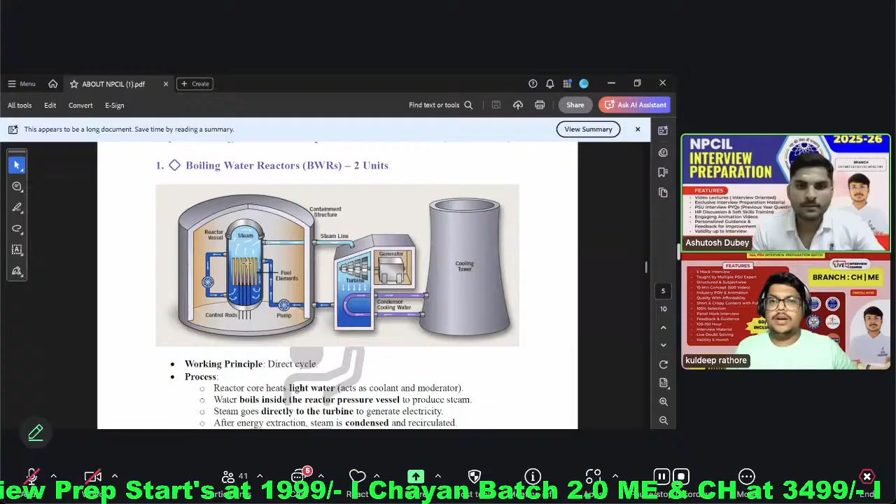Here the main problem is that our primary and secondary coolant are in a single cycle. So most of the radioactivity also comes into the turbine building. So this is the disadvantage of this type of plant. The Tarapur 1 and 2 are boiling water reactors.

And this is a standardized PHWR - indigenous plants, standardized PHWR. Here we follow three cycles. The primary cycle we call primary heat transfer, so it goes from the reactor to our steam generators.

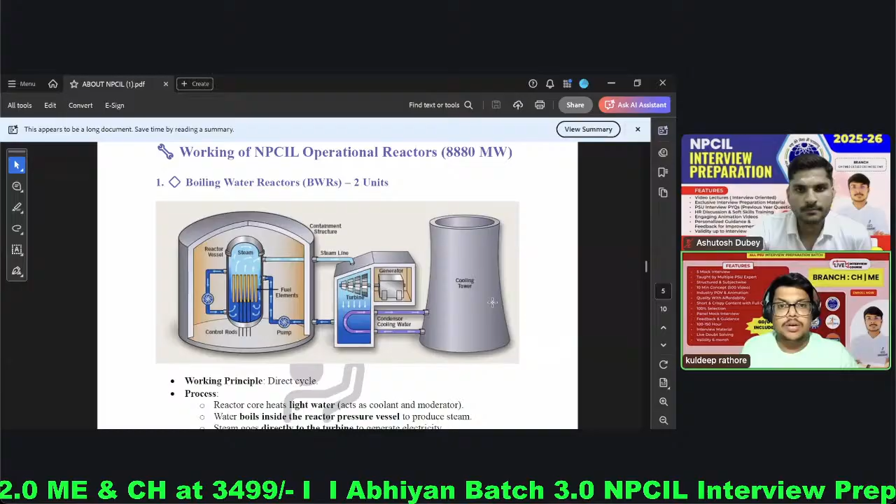And there is the secondary cycle which includes steam generators, turbine and condenser. And to cool the condenser water, we use the tertiary cycle. So there are three cycles in standard PHWR. But in boiling water reactor, there are just two cycles - primary cycle from here to here. So BWR has two cycles, and PHWR has three cycles.

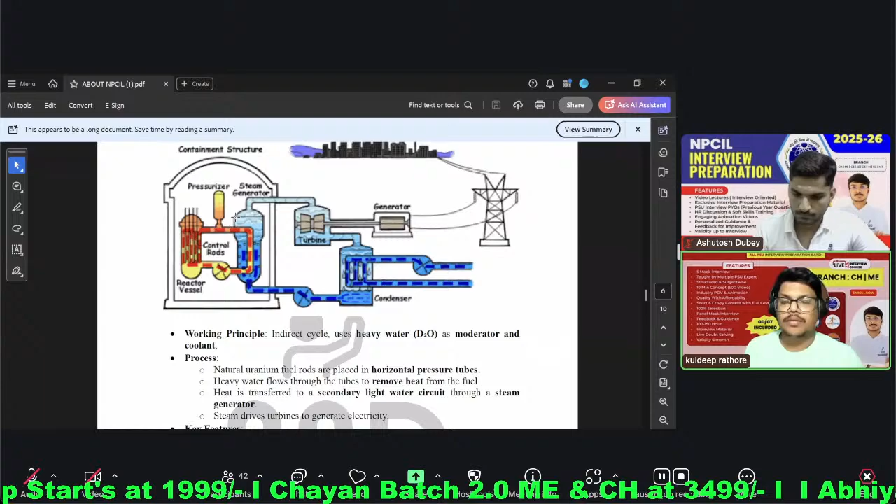So here we use moderator and primary transfer medium - both are D2O. So PHWR uses D2O in the primary cycle. BWR and LWR use light water.

So here also just three cycles - primary from core to steam generator, secondary from steam generator to turbine and condenser, and third cycle from condenser to cool the condenser. The main difference between LWR and PHWR is here.

It shows that in PHWR we have control rods and calandria, with fuel in the horizontal direction. In LWR we use a pressure vessel where fuel is in the vertical direction.

And the other thing in LWR we use enriched fuel, enriched uranium - approximately 5% uranium-235. But in standard PHWR, we use natural uranium, which has approximately 0.7% uranium-235. Enriched uranium has approximately 4.3 to 5% uranium-235.

Okay, so sometimes they can ask why. Just give me one second.

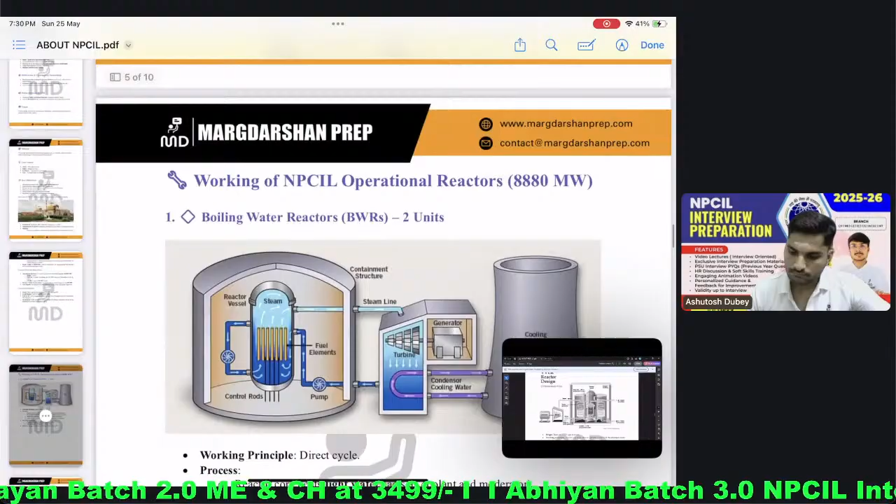So Pressurized Heavy Water Reactor, as given in the documents also - I will tell you, Pressurized Heavy Water Reactor is where the coolant is D2O. Basic information you need to know - coolant is D2O.

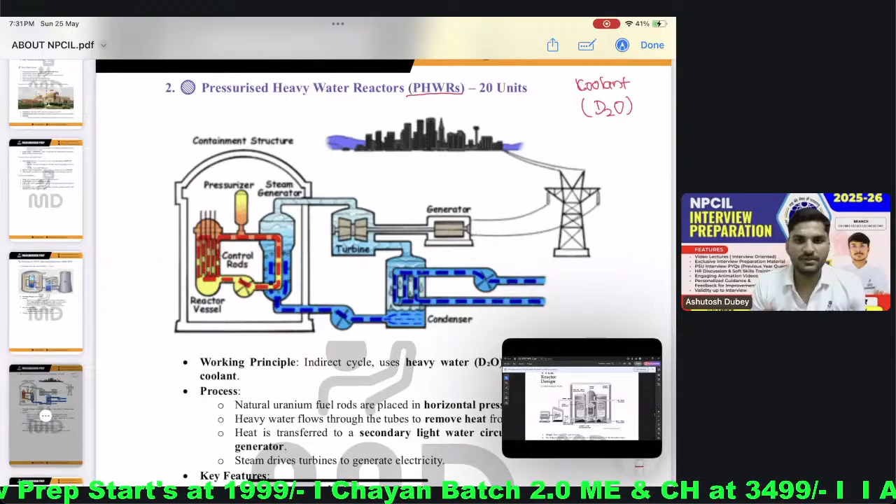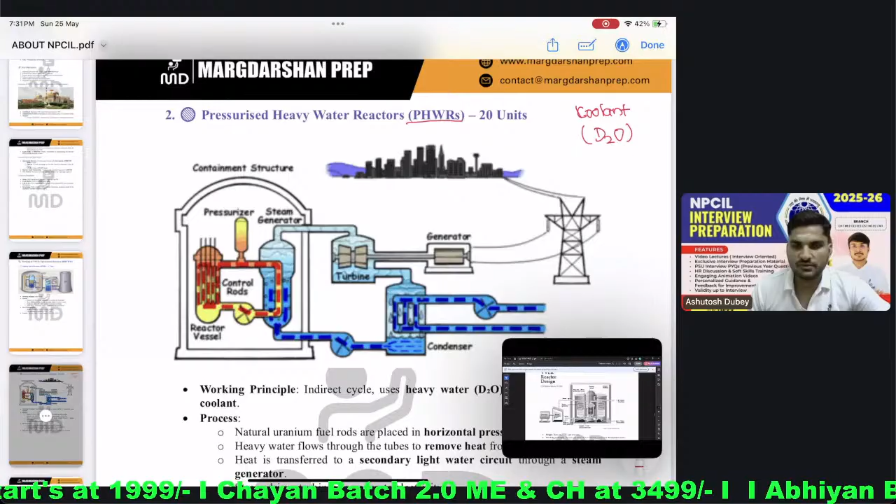Its full form is pressurized heavy water reactor. Currently, NPCIL's whole vision, whatever projects it is expanding in future, all reactors are mostly coming in PHWR. LWR is another technology, it is Russian technology. LWR plants are in Kudankulam near Kanyakumari. So LWR is light water reactor, PHWR is pressurized heavy water reactor. LWR uses light water as coolant, that's why it is called light water reactor. Pressurized heavy water reactor uses coolant D2O, so that is called PHWR.

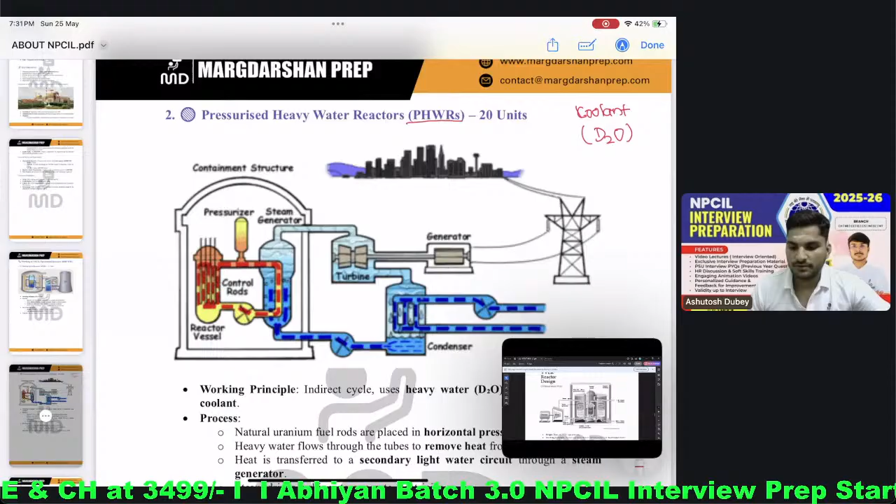All the expansion plans of NPCIL are centered about this PHWR technology. As sir told you, PHWR technology expanded initially at Madras Atomic Power Station. After that, Rajasthan RAPS 1-2 came. Tarapur also came, now known as Tarapur Boiling Water Reactor. This was the first plant, which came around 1969. This is boiling water reactor, a different technology from the two I told you, PHWR and LWR.

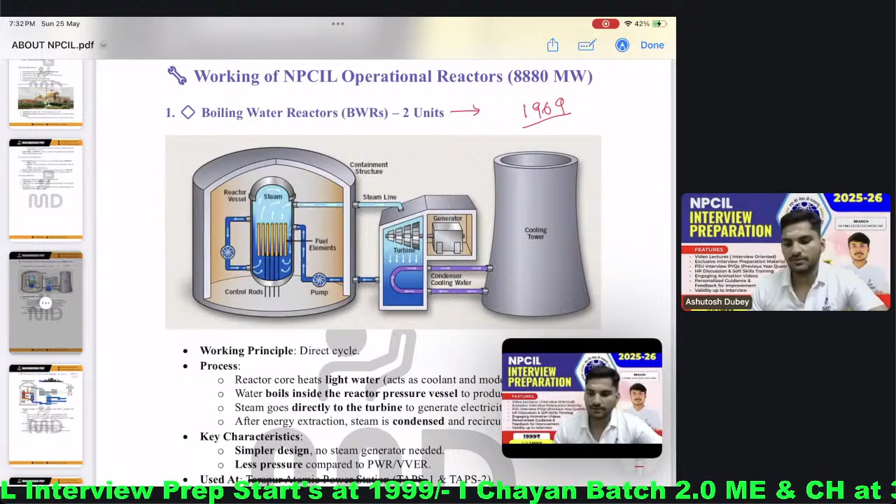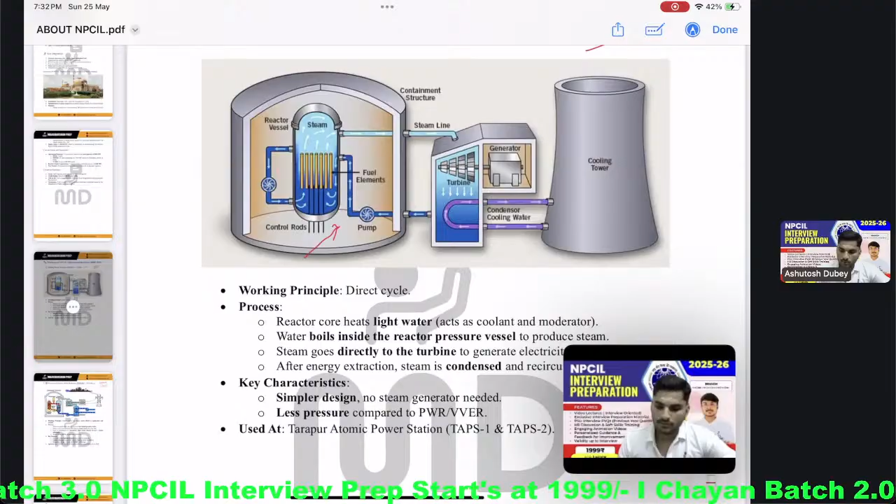This is the initiation of nuclear technology in India. This is still in Tarapur, known as TAPS 1 and 2. Some modification work is still going on in this unit. In this case, the water is directly boiled into the pressure vessel. So this steam, which is generating inside this vessel, is directly going into the turbine.

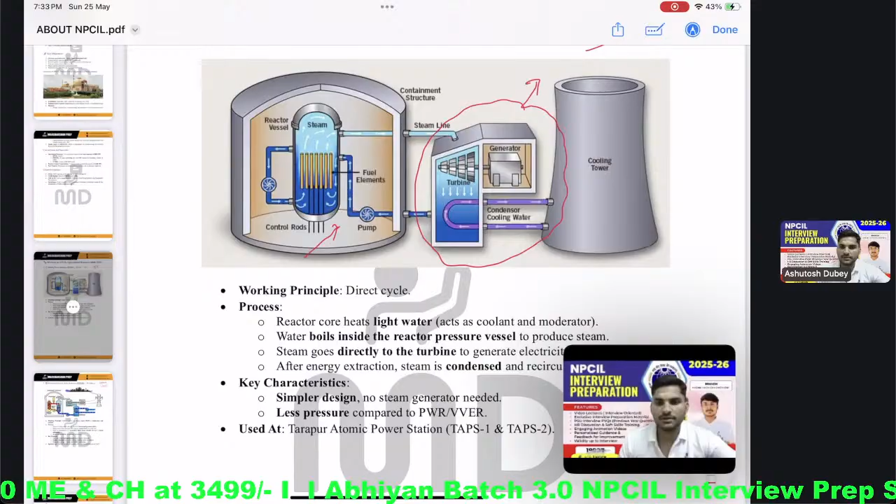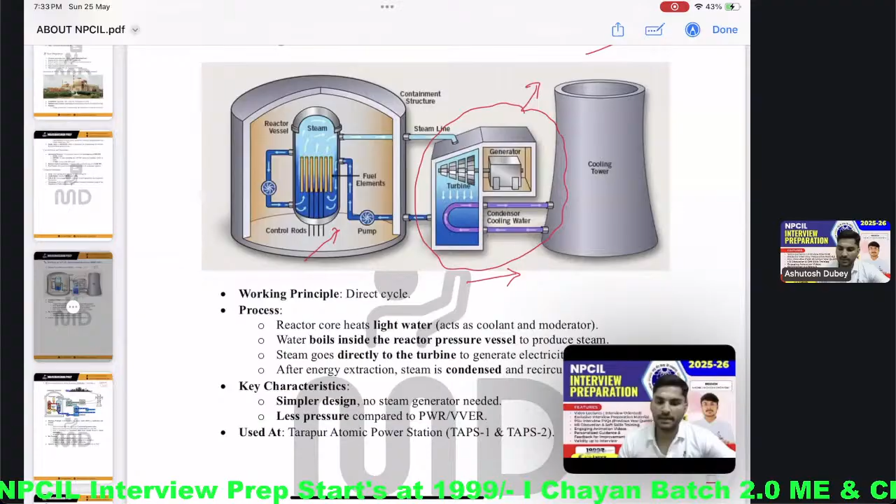One major disadvantage of this type of reactor is that the turbine building also gets contaminated, as radioactive substance goes there. But still, it was like a testing approach from NPCIL. So this is actually a legacy type of thing for NPCIL or the nuclear industry in India. After that the expansion plan came, like MAPS 1, 2 and RAPS 1, 2, Rajasthan 1 and 2 and Madras 1 and 2. Those were PHWR, but it was not standardized.

After that, one plant came, Narora. Someone is saying that voice is lagging. Jess, can you confirm that?

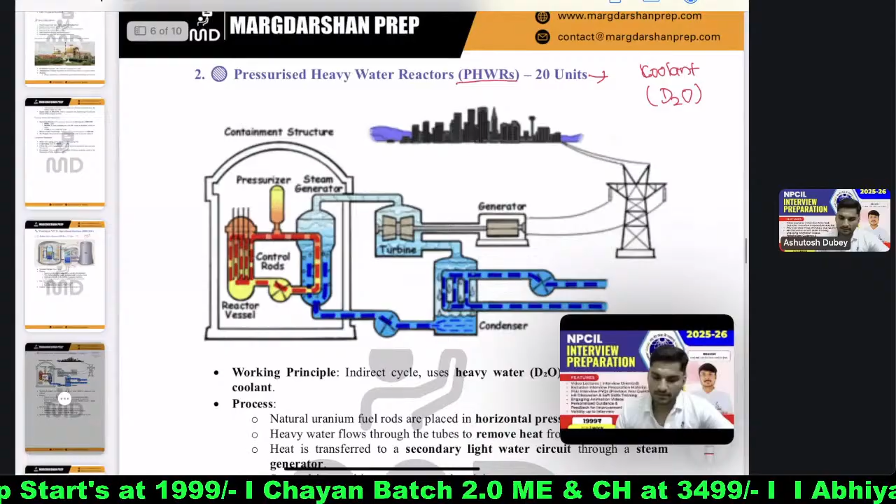After that, Madras and Rajasthan 1 and 2 came together, so they were not standardized. Actually after that, some problems came through Canada and the CANDU type of reactor, if you go deep you will see that. So countries like Canada stopped supporting us. After that, our own engineers and scientists developed new technologies, and through that they standardized some things in this reactor.

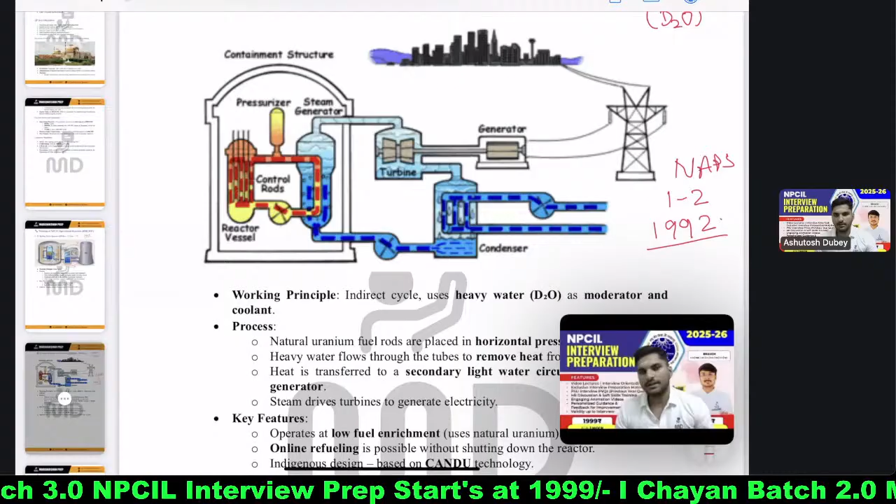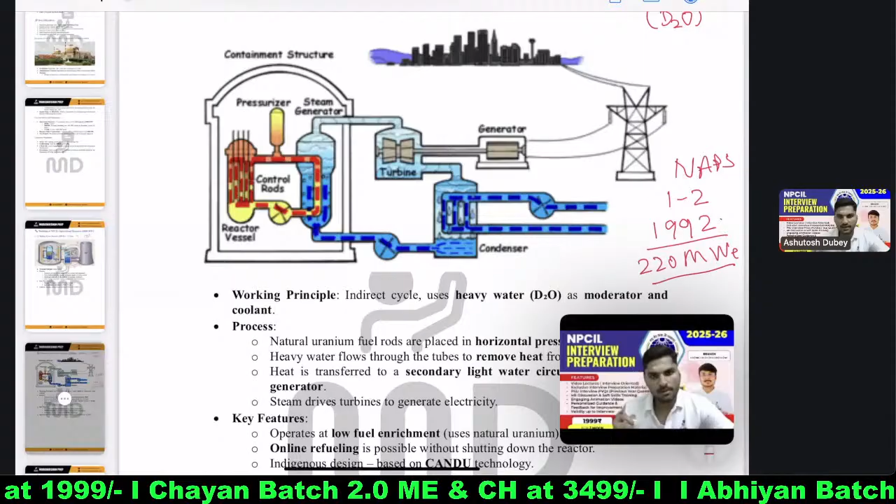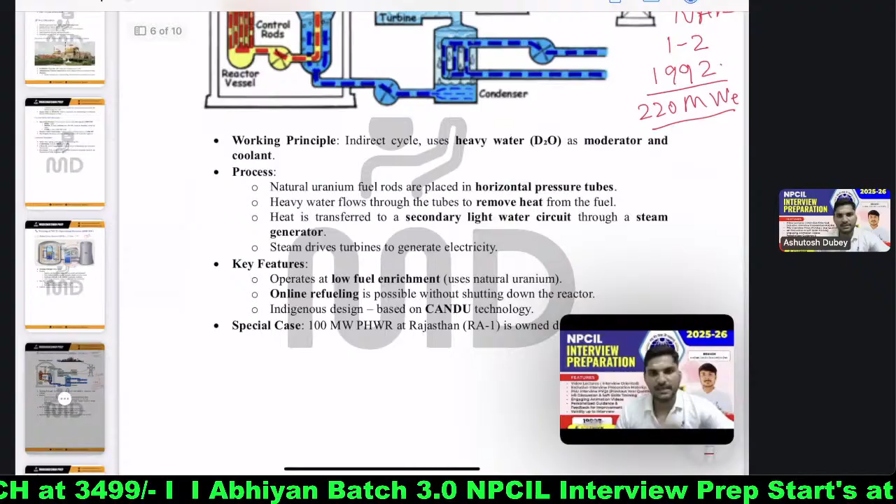After that, NAPS 1, 2, Narora Atomic Power Station, came around 1992. Because of learning from previous experiences, we were able to build this. This is also 220 megawatt PHWR. LWR is only Kudankulam, and you can say TAPS 1 and 2 are also some type of boiling water reactor. After that, major expansion came to Kakrapara 1 and 2. Those are all standardized plants, meaning there were some more modifications into that.

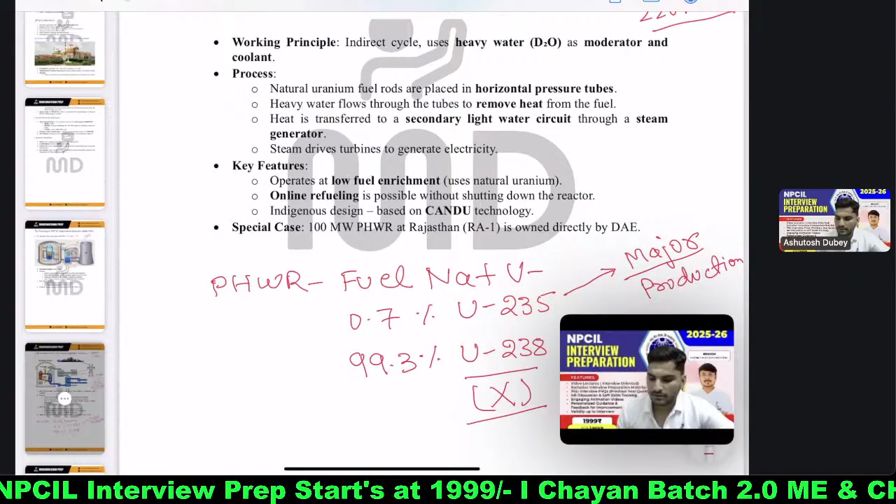One more thing that can be asked to you in interview is which type of fuel is used in PHWR. In PHWR, fuel is natural uranium. Natural uranium contains 0.7% of U-235 and the rest, 99.3%, of U-238. Naturally, that fuel has 0.7% of U-235 and 99.3% of uranium-238. Major electricity or energy production comes from U-235 only, because it is a fissile material. U-238 does not produce any energy inside the reactor. So this is a basic thing that can be asked.

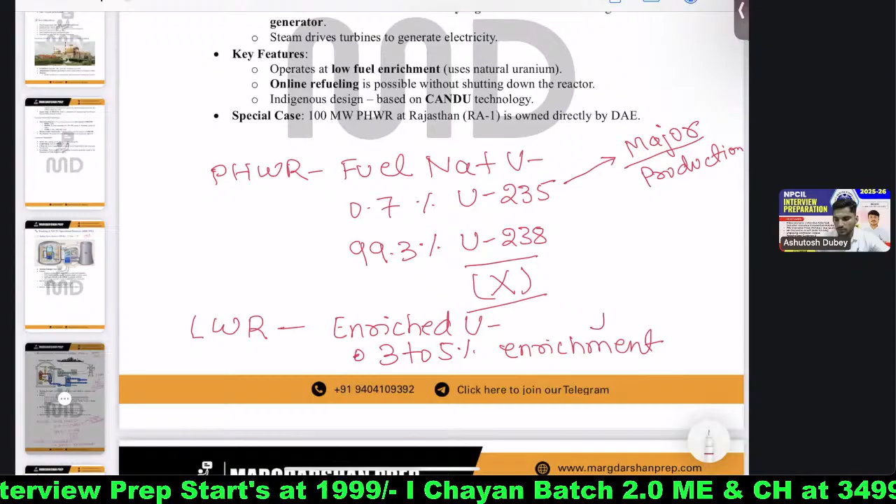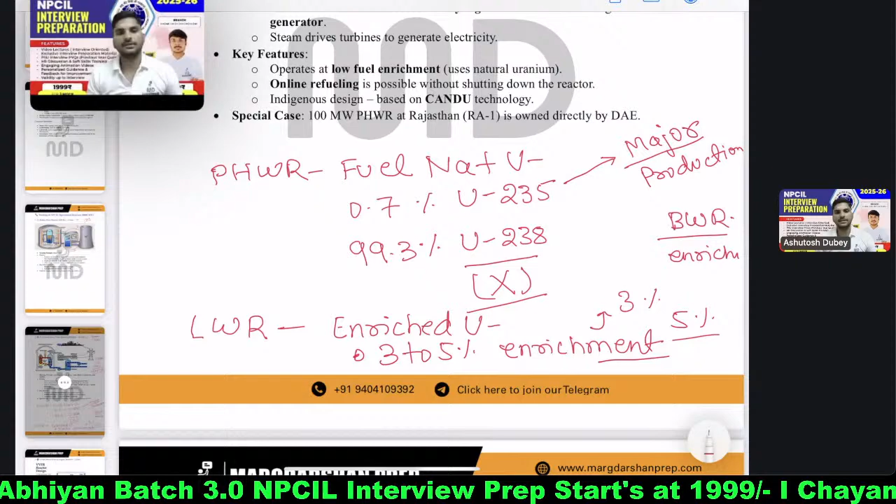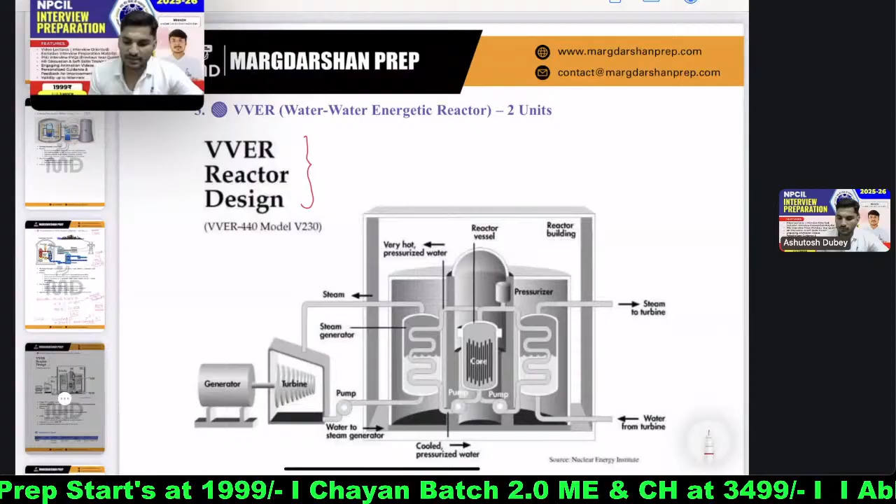In case of LWR, we are using enriched uranium. Enriched uranium means 3 to 5% enrichment is done in natural uranium. In this case, uranium-235 will become 3% or 5%. So these are the two technologies that we are majorly using. And in BWR also, enriched uranium is used. So these are the three major types of reactors that NPCIL is operating. This VVER reactor name is Russian, meaning water energy reactor.

Actually, Voda means H2O, because H2O is being used as coolant. That is why it is known as Voda. This is a Russian name. So here also one reactor vessel is there, and in that reactor vessel, coolant channels are aligned vertically.

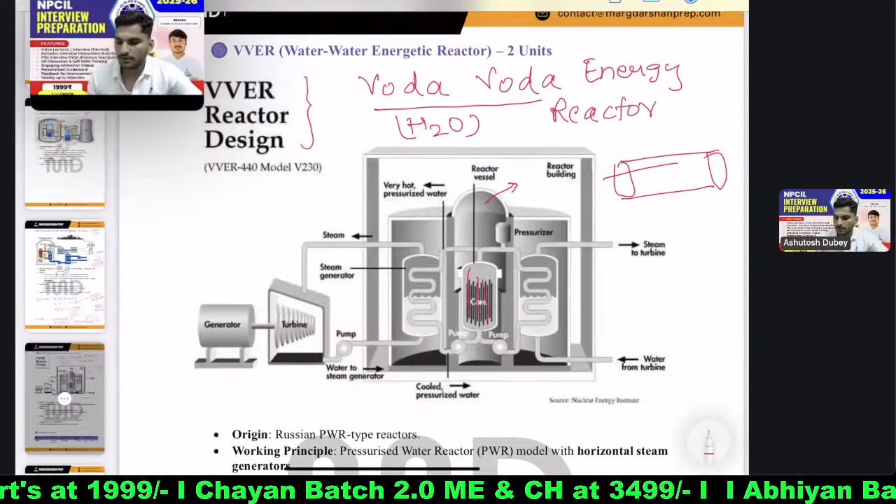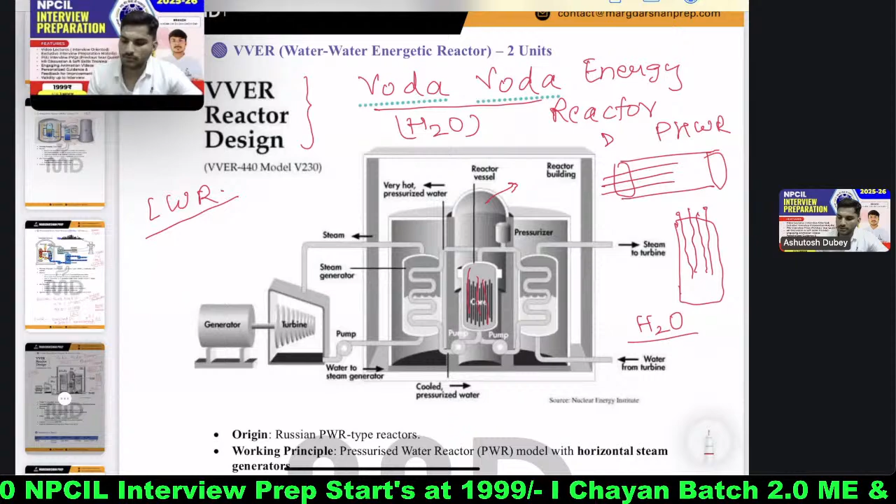Like in PHWR, coolant channels are aligned horizontally. This is PHWR, and this is your VVER, also called LWR, light water reactor. Here coolant channels are aligned vertically and coolant is H2O. In PHWR, coolant is D2O. Same technology here, we have just aligned the coolant channel vertically.

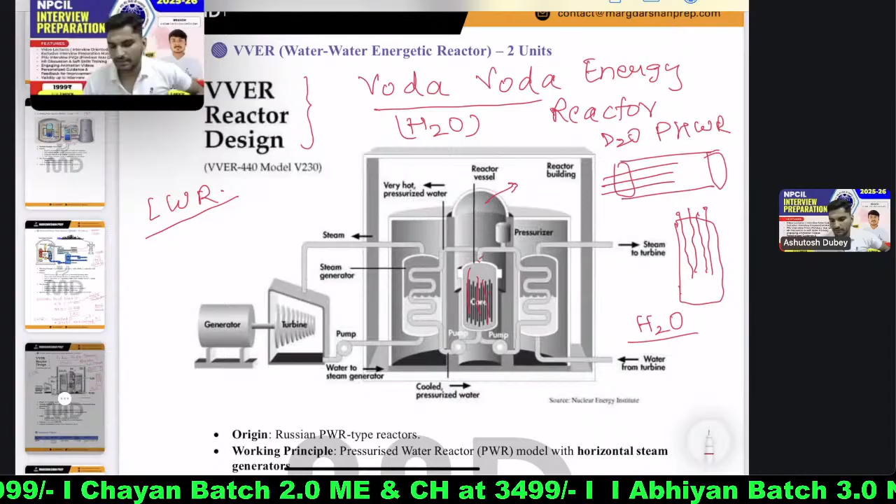After that, the same coolant H2O goes to the secondary side, that is the turbine side, and there the heat exchange happens, and according to that electricity is being produced.

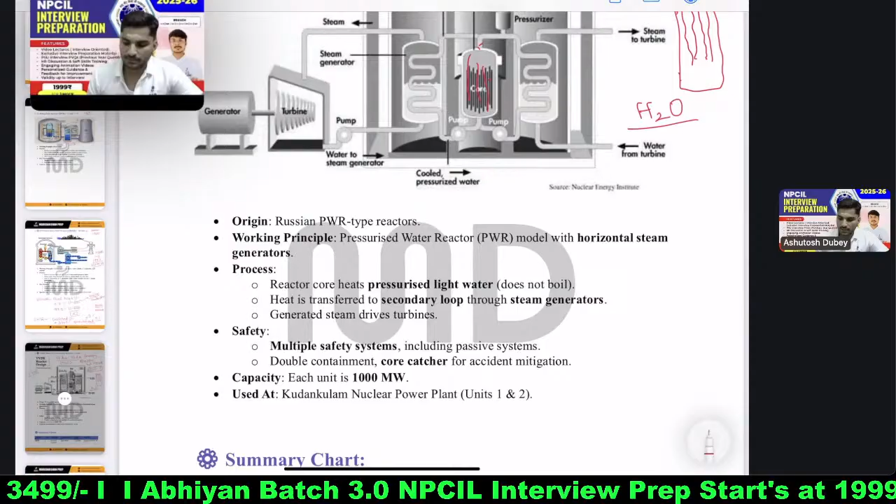You can see the working principle of PWR is a horizontal steam generator. Steam generator is actually a boiler. Here in the nuclear industry it is called steam generator, but in normal industries, thermal power plants, they call it a boiler. So the steam generator of this LWR reactor is horizontal.

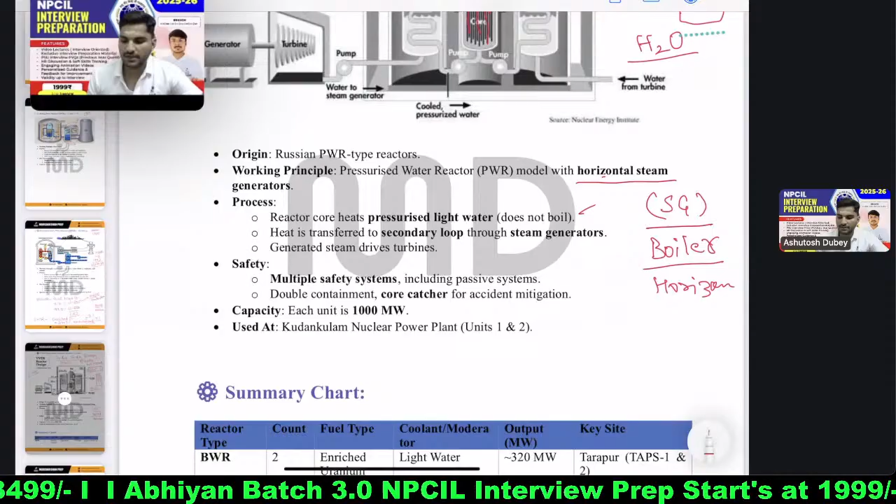A reactor core heats pressurized light water because pressure is very high, somewhere around 160 kg. That is why water does not boil inside it. And next, multiple safety systems.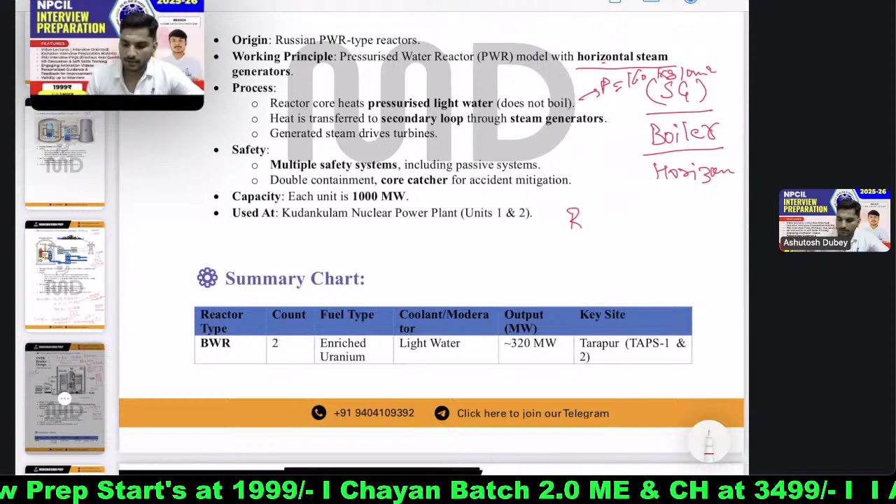This plant is operated by Russian technology. I have heard, though I have not gone there, that maintenance activities or surveillance testing also happen under their guidance only.

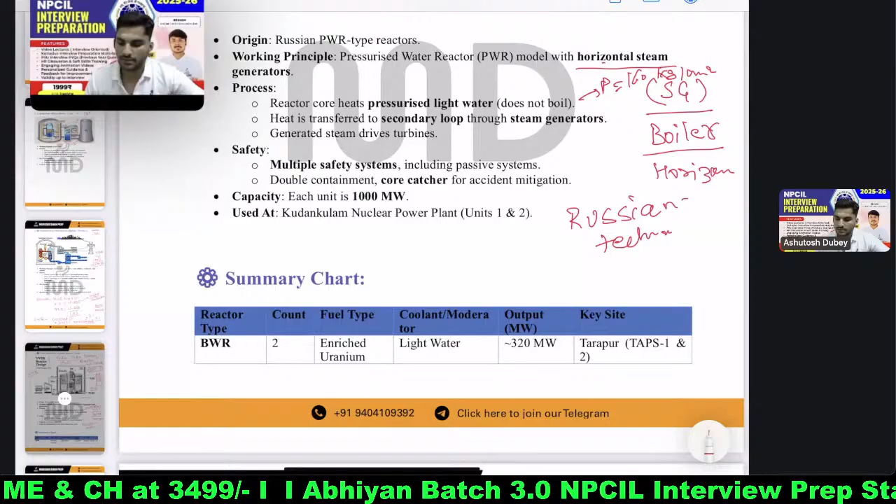So basic things they can ask you, like in BWR, enriched uranium is used. What is BWR? Full form of BWR is boiling water reactor. They will not go into deep detail because nuclear things are very complex, and it needs a lot of time to study and go deep into that.

Tarapur, this is operating in Tarapur. PHWR is 20 in number. They can ask about the expansion plan of NPCIL. What is the vision of the company? So the vision of the company, as Kuldeep sir also told you, is that NPCIL is planning, by 2047, for 100 gigawatt electricity generation through nuclear technology.

Because of this high vision, or very big target which NPCIL has set, the reactors are coming very fast in India.

BWR, as I already discussed, enrichment is 3 to 5%. PHWR natural uranium is 0.7%. VVER enrichment is also 3 to 5%. Light water, heavy water - this is the specific thing that you should remember before going to the interview.

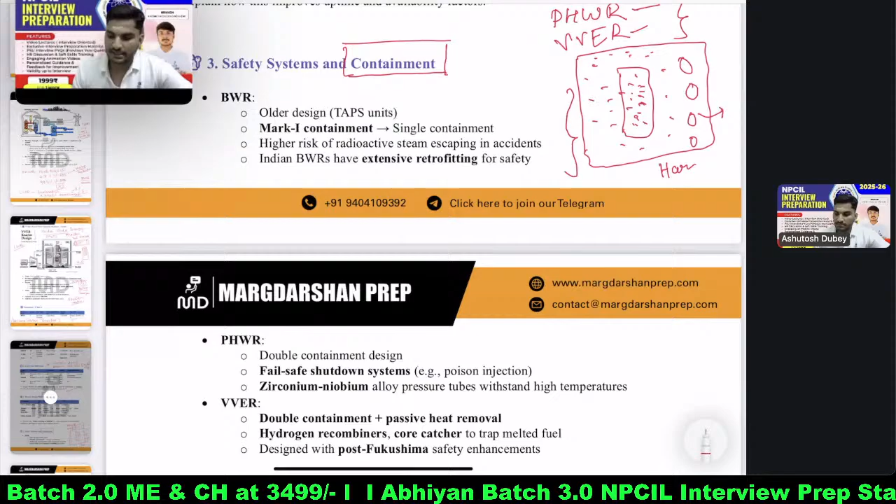PHWR is a double containment design. In a double containment design, one containment is there, inside that one reactor vessel is there, and after that there is one more containment. This annular space, around 1 meter, is there in between, so that the radioactive substances generated because of the reaction, different types of fission products, should not come out.

If it is coming out here in the annular space, that will also be purged out. Purging also happens, and some of it, not a lot, because of AERB, the Atomic Energy Regulatory Board, which regulates this industry, has set limits about how much we can discharge into the public domain. So that is not a problem.

The limit they set is not very high - after a lot of calculations they set that limit, because I read from their manual that the limits are set so that it can never harm the public domain. There have been a lot of different types of barriers created so that the radioactivity does not come out to the public, and people working in NPCIL are also not affected by this radioactivity.

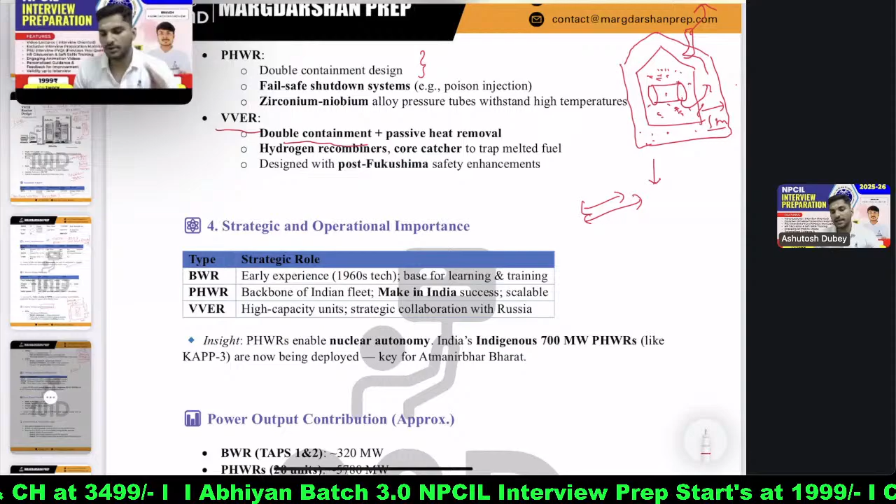So those are not a problem here. Next, VVER also has double containment. Double containment means the radioactivity should not come out, and it's very rare that any accident happens in this nuclear industry - excellent design from our scientists and engineers.

Next is the strategic and operational importance. BWR early experience from the 1960s - as I already told you, in 1969 when it came, it was majorly focused on the learning experience because India was not in the field of nuclear energy, so they were experiencing how we can operate it safely.

After that, PHWR, as it is written, is the backbone of the Indian fleet. 90% of reactors coming up are PHWR only. Expansion is happening here with high capacity unit VVER.

The LWR reactor I was talking about, light water reactor, is known as VVER 1000. 1000 means 1000 megawatt reactor. Highest capacity of reactor that has come from NPCIL till now is 700 megawatt, and all the new plants coming are 700 megawatt only.

Power output contribution: BWR 320 megawatt, PHWR 5700 megawatt. Total capacity you can remember, total capacity of NPCIL currently is somewhere around 8100 megawatt. After KKNPP, this Kudankulam VVER, two more units come into the line, then this capacity will drastically change and go to 10,000.

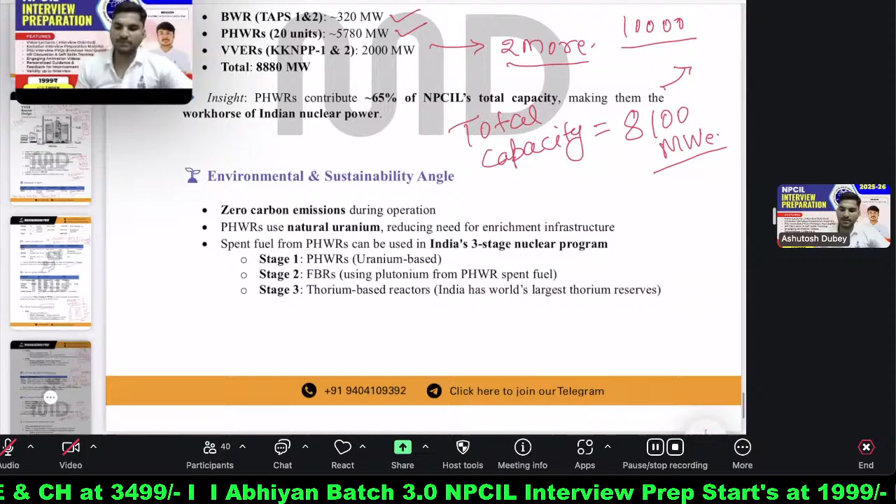So this is the next angle - environmental and sustainability. As I told you, zero carbon emission during operation because there is no fossil fuel burning inside it. Only natural uranium undergoes the fission reaction, and that's why we are able to create energy.

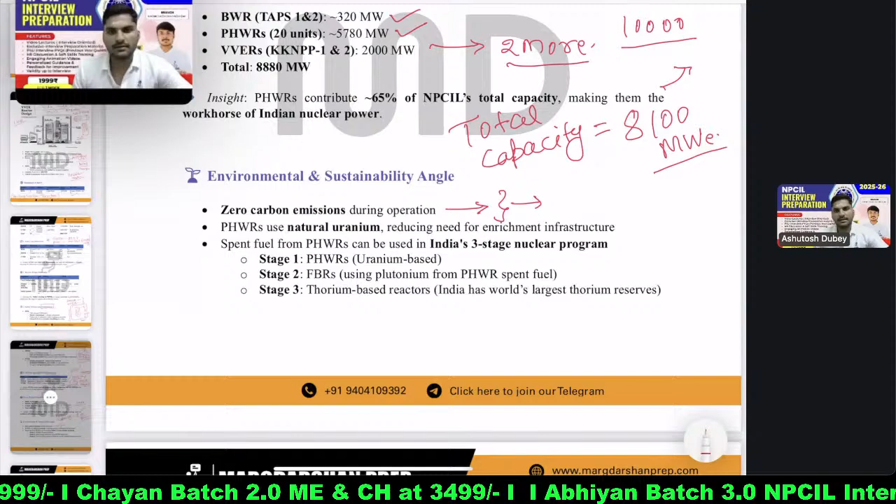And unlike coal plants, you don't see a lot of ash and all these things here - this plant is also very clean. When you visit inside a nuclear power plant, it is very different from other power plants.

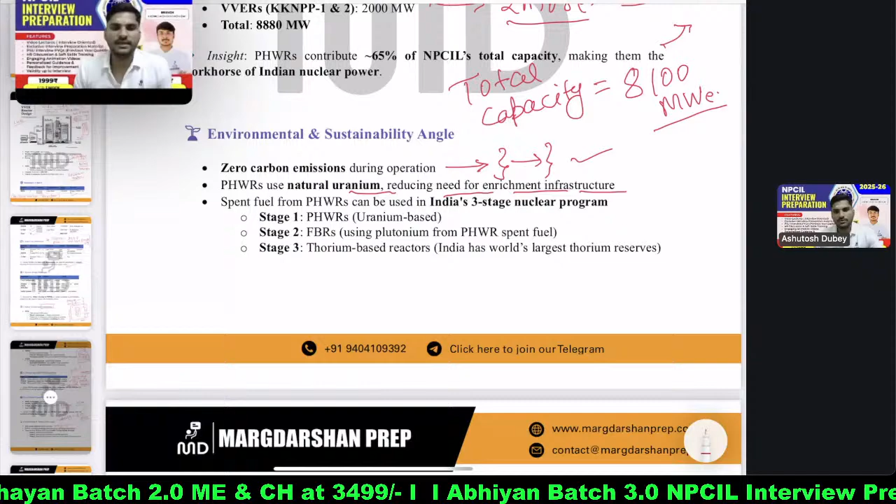PHWR uses natural uranium as fuel, reducing the need for enrichment infrastructure. Natural uranium - I cannot say it's a disadvantage because it's naturally occurring, having 0.7% U-235 content. Based on our requirement, we enrich it so the 235 content is increased, so that we can produce more energy through that.

Spent fuel from PHWR can be used in India's 3-stage nuclear program. Yes, this is one more important thing that can be asked. Stage 1 is PHWR, which is uranium based.

PHWR is uranium based, and the second stage is FBR using plutonium from PHWR. Actually, stage 1 is what I was talking about in the history of NPCIL. In stage 1, we use natural uranium, which contains U-235 as well as U-238.

Natural uranium U-235 is 0.7%. It is able to give us energy because it's fissile material - fission can happen in U-235 very fast. But for U-238, fission to occur requires a very fast neutron.

That's not relevant to you, that's nuclear physics domain. We need some specific kinetic energy neutron that will hit 238, then it will undergo fission. But 235 can undergo fission through a thermal neutron.

Meaning, even if it's a slow neutron, that will create fission in 235. But 238 does not undergo fission - instead, 238 absorbs one neutron produced through this 235 fission. The material becomes combined now, 235 and 238, because the neutron is generated, absorbed by 238, and after 2 days of operation inside the nuclear reactor, plutonium-239 is formed.

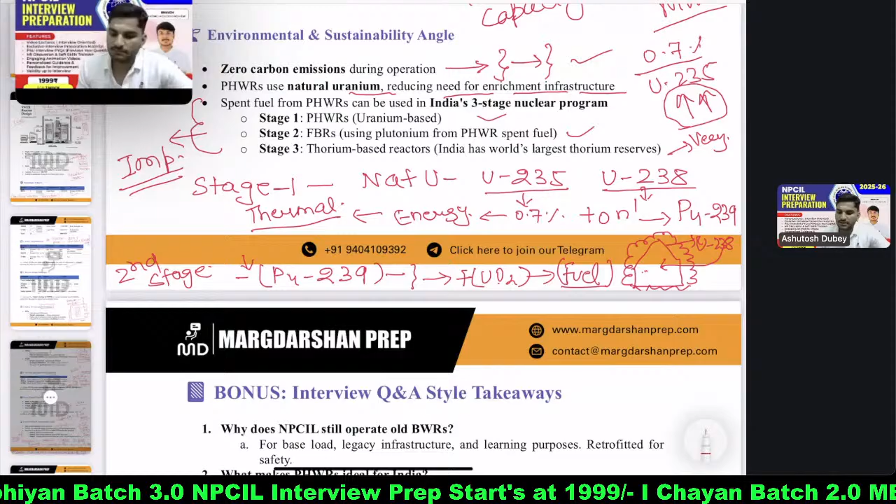India has the world's largest thorium reserves, like 80 to 85% - I'm not sure about the exact figure, but thorium reserves are there, so we want to develop this technology. One Kamini reactor is there in Kalpakkam, developed by BARC.

That reactor is 10 megawatt. The third stage has also been developed, in 1984. But it cannot go under expansion directly to 400 or 500 megawatt, because a lot of consideration takes place for any small project to move to large scale. So this has been a test reactor only. Again, thorium based reactor, if we succeed in the second stage, which we will, because the reactor is going to come up next year only. It has been commissioned, fuel loading has also been done. So it is going to come into action by the start of 2026.

500 megawatt reactors are there in fast breeder. So these are the 3-stage program of India's nuclear program. This was all the things I have touched upon technically, very little, because this is a very big topic. That plutonium-239 that comes from our PHWR, NPCIL is operating stage 1. The second stage plutonium-239 is used for strategic purpose. I cannot tell you on this forum where we are using this plutonium-239, but it is used for a strategic purpose, very important for us, in the medical domain and some other domains also.

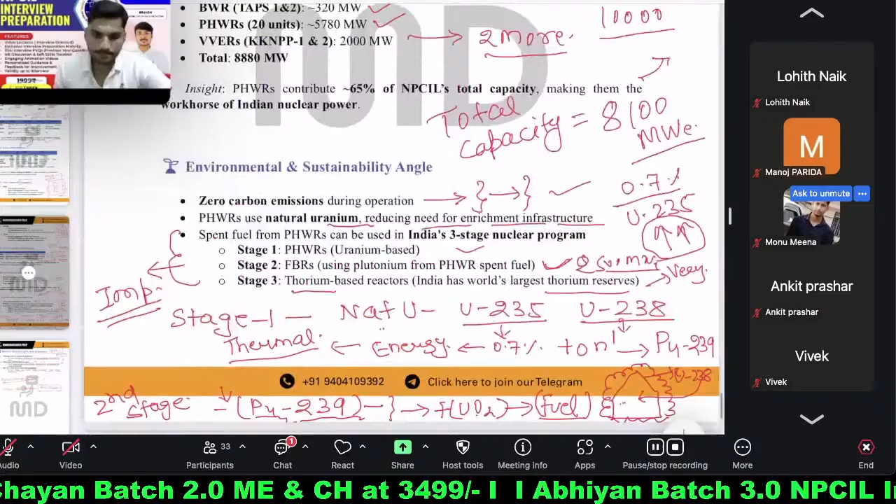Yes, East Japan nuclear disaster 2011. A metal-water reaction took place in that Fukushima incident.

Hello. Yes, yes. Hello. Good evening, sir. First of all, thank you for this session. So my interview is regarding NP. My doubt is regarding the NPCIL interview, but not regarding this part.

Sir, I have to ask, do I need to prepare a different theoretical part? Do I need to prepare questions and derivations also of the theories for the interview?

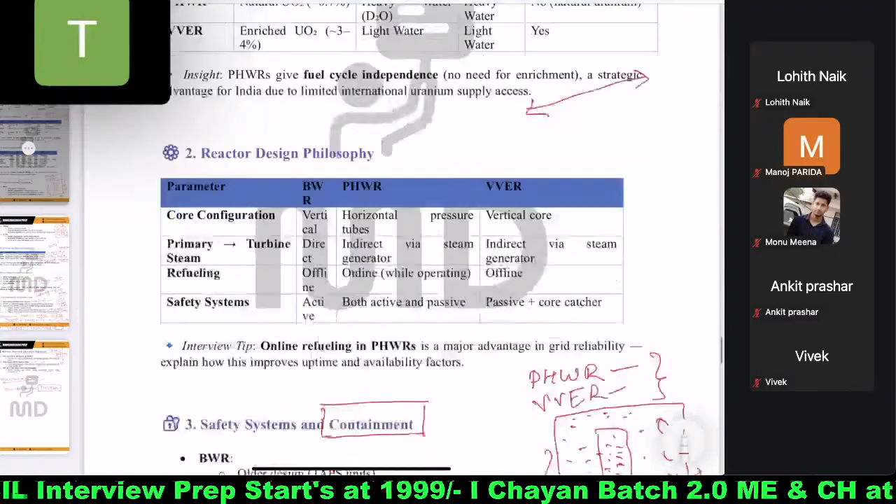Do you have any work experience also? No, sir. Okay, then you have to prepare that theory, 4-5 subjects only, but prepare it in deep, and just try to look at some derivations also. They can ask you to draw some diagram also.

And sir, do I need to prepare for questions also like ESE previous year, GATE previous year questions? Do I have to revise it once again? No, I don't think so. Those type of questions are not asked. You need to be very clear with your concept only. No need to revise for those previous year questions, be very specific in your concept only.

Okay, thank you. Sir, can this PDF be uploaded in the app the same as you have written? I will ask Jayesh.

Okay, anyone else? Sir, I have a work experience. So what should I prepare from the work experience? Can you just describe? No, you are not audible, ask a little bit clearly. Sir, is it audible now? Yes, yes. Sir, I have a work experience. What should I prepare from this work experience? In which domain do you have experience?